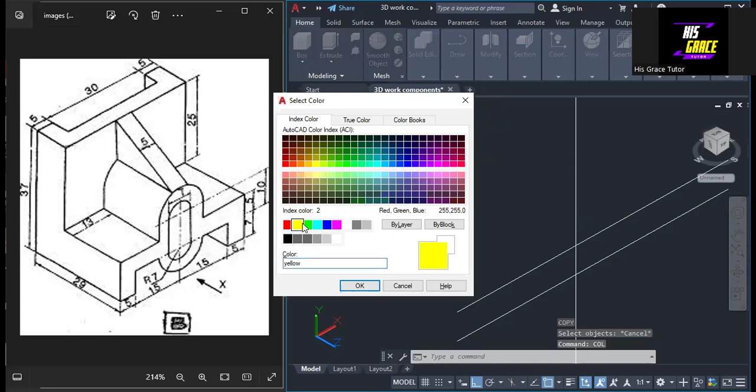Okay, so I'll come to draw, and then I will click on this circle. Coming to this center, I will draw a circle of radius 7. Enter.

Escape, I need to repeat it. Coming to this center, I will draw a circle of radius 7. Okay, then I will repeat it.

So for me to draw the one up here, this one, I'll make use of this center and draw a circle of radius 7. All right, so we have the circles now.

So what I'm going to do now is trim this circle. I will take half of each of them, I will take it off. So I click on trim, and I'm going to trim this.

Just look at the way I'm doing it. So we trim this off. All right, so then we have half of each of them.

Next thing I'm going to do is come to draw and click on polyline. I'm going to draw a line from here to here. Okay, so we have that. Then I will repeat the line, also drawing from here to here.

So all right, then I'm going to join them together. I will type join on my keyboard, then enter. Then I'm going to select this, select this, select this, and also select this, then enter. So here we have it to be 1. Okay, you can see it.

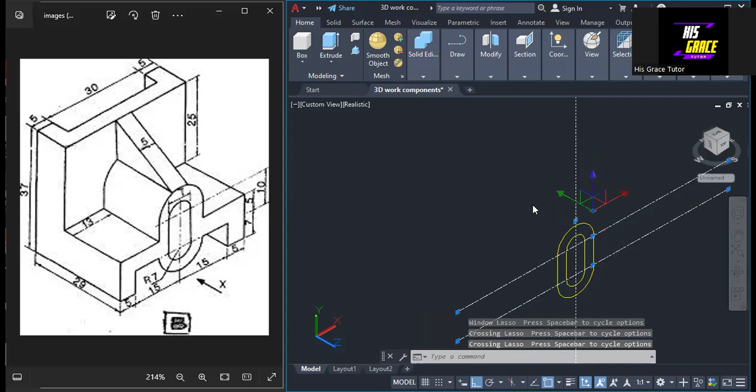Next we are going to extrude each of them. So EXT, enter. Then we select each of them, the object to extrude, then enter.

So we have both of them. The distance is 19, so that is 19, enter. So we have them - one here, one here.

I'm going to subtract this one from this because this is a hole. So to subtract, SUB, enter.

Then select the major one, press enter, then select this one. I need to repeat it - subtract again, select the big one or the major one, press enter key, then select this one, enter. So it has been created, as you can see here now.

So we are done with this part. Next I'm going to create this part, and I want to create this part. So how do I do that? We come to draw and click on polyline.

The distance from here to here is 13, from here to here is 12, from here to here is 5, from here to here is 7, from here to here will be 8. So we come here and draw a line of 13 distance, enter, then we come down by 12, then go here by 5, then it goes up by 7, then comes to this side by 8.

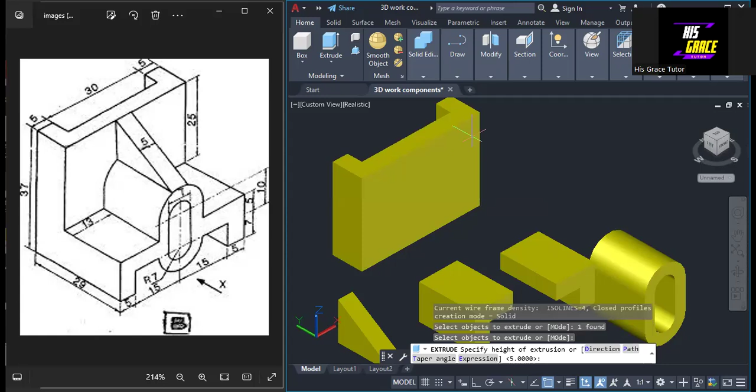All right, so with what we have done here, we need to put this part together. So I'm going to do something here - I want to maximize this so I can see the whole shape here. So that is what I want to do. You can see how simple this is.

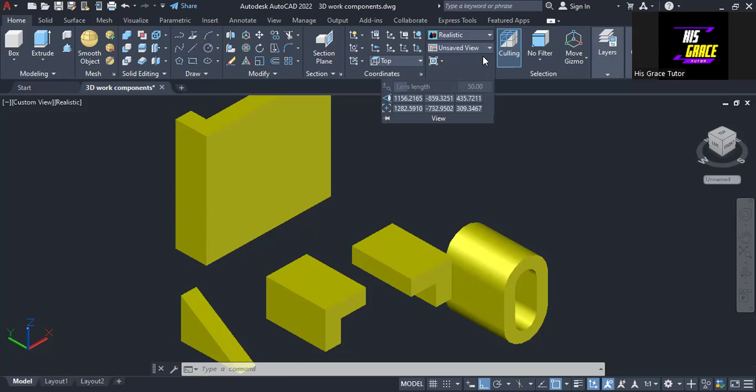The next thing we are going to do is come to view here. So I'll come to view. All right, so I'm going to change it to 2D wireframe.

Okay, so now we type move on the keyboard, then enter. I'm going to connect this point here to this point, and also this point I will connect to this point. Let's start with this.

Just select the object to move, right click, then take it like this. So we come to this point, and enter.

Okay, so I remove - repeat the move, sorry. Select the object to move, right click, then we take this point and join it to this point here.

Then for this particular one, we are going to move this also. We right click and repeat move. Select this object that we are to move, and take note of the point that we are joining this point together with this point. So this point, we are going to join it to this point. Right click, then go with this point like this, then click. All right, so we have that.

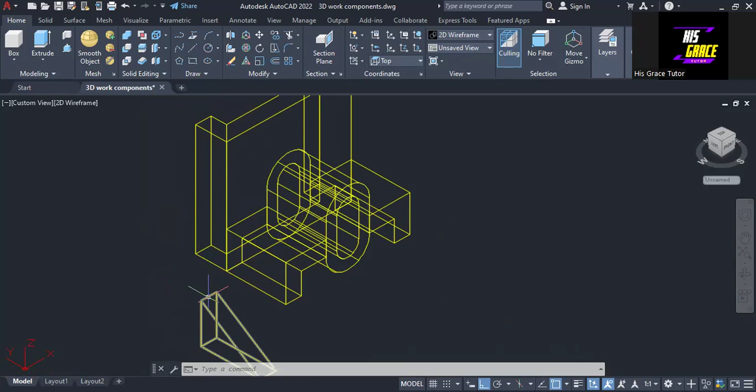Then also we want to bring this one - we want to place it on this. The midpoint is what we are going to target, the midpoint of this. So we repeat move, click on move.

All right, move again. Select the object to move, right click. The midpoint is here - so we are connecting the two midpoints together, the midpoint of the object that we are moving and this one. So this is the midpoint, as is shown there.

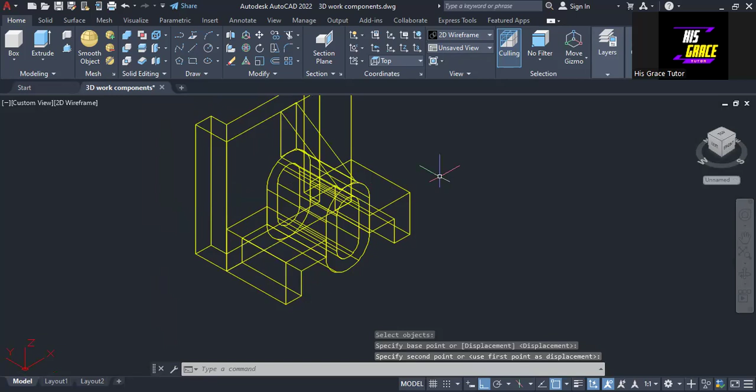So look at what we have here - we have assembled them. What I'm going to do now is switch to the realistic view. So as we have here, you can see how we have assembled them. But they are not one, they are pieces, so we need to unionize them - we need to join them together. So how do we do that?

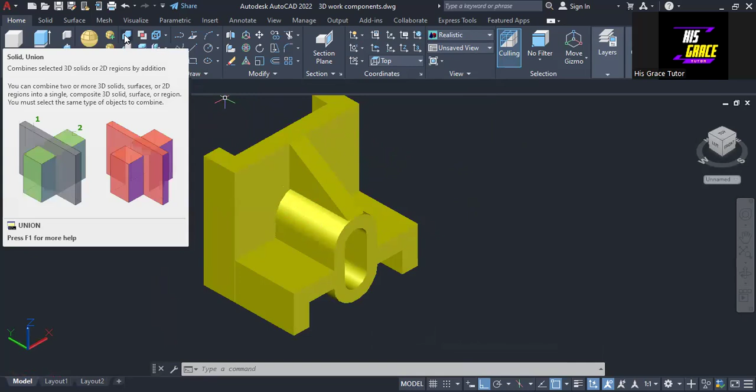So we come to - we have union here, this is the icon for union. Click on this, select each of them one by one. All right, then press enter key on the keyboard, so you can see we have this to be one.

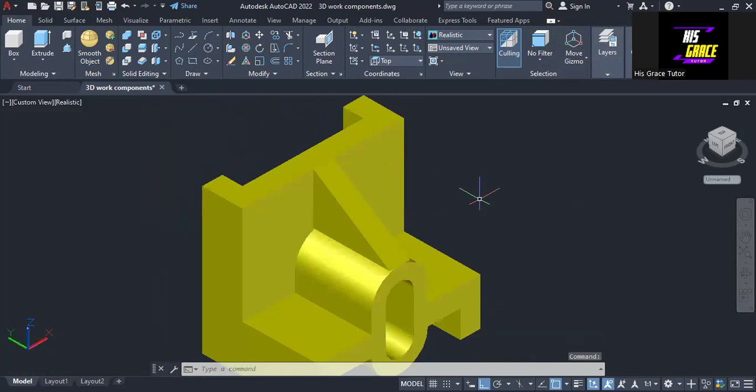So it's as simple as I've done it here. All you need to do is practice, so you can see how simple it is when I made this object. Thank you, keep on practicing and God bless you.